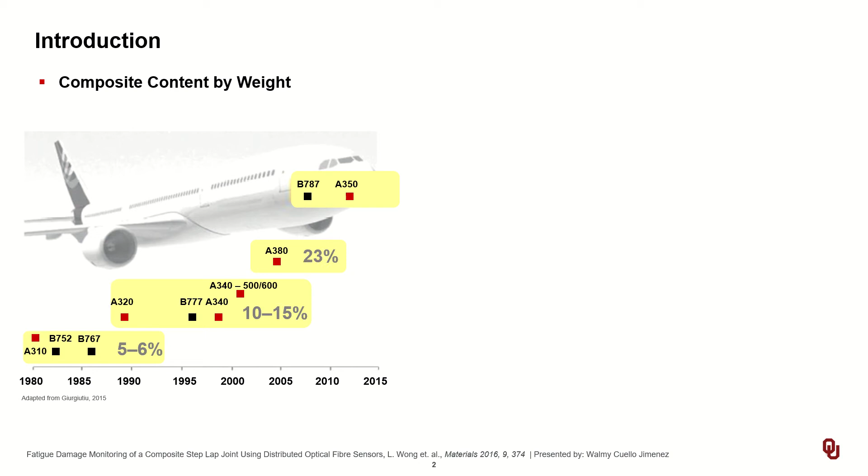Here we're looking at how the composite content by weight has evolved over the last decades. The two major aerospace companies, Boeing and Airbus, have increased their composite content on airplanes from 5 to over 50% over the last 40 years.

Large composite structures are typically manufactured by adhesive joining of separately manufactured parts. This presents several advantages, especially when compared to mechanical joints: reduced labor and costs, uniform load distribution over larger areas, reduction in stress concentrations. However, there is a key disadvantage of this technique, which consists of stress concentration at the edge of the overlap.

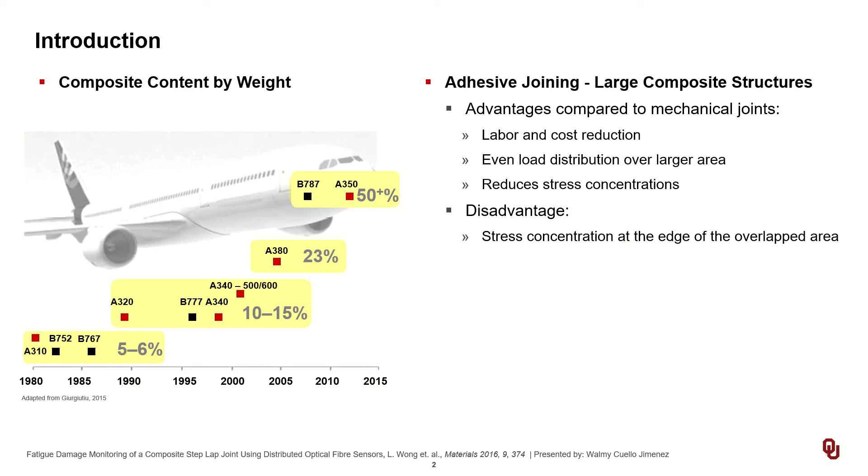In order to minimize the peak stress, or the stress concentration, many groups have proposed the use of step-lap joints as an efficient joining methodology. A step-lap joint consists of manufacturing the parts with a series of steps that result in greater bonding surface area, reduction in stress concentration at the end of the overlap, high joint strength, and more importantly allows for efficient and effective joint repairs. Ultimately, reaching more than 50% composite content by weight in the aerospace industry could not have been achieved without the use of step-lap joints.

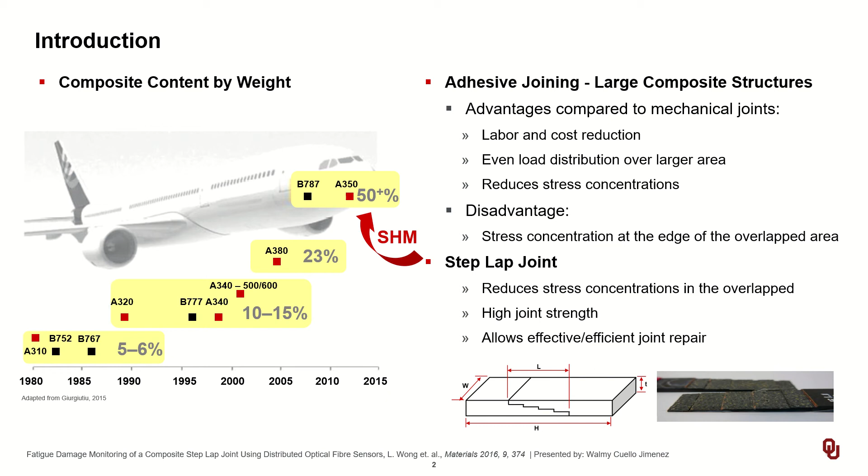Consequently, this work focuses on structural health monitoring and evaluation of step-lap joints by employing distributed optical fibers to monitor fatigue failure. An optical fiber consists of three key components: a core, an annular cladding, and a protective coating.

They have multiple advantages, including immunity to electromagnetic interference, resistance to corrosive environments, the ability to multiplex multiple signals into a single fiber and then allow for measuring multiple variables, and allowment of embedding the fiber into composite materials for real-time and in-situ monitoring.

However, there are two key disadvantages: the need of optoelectronic equipment in order to translate the optical measurements into meaningful physical variables or measurements such as temperature and strain, and the bandwidth required for these devices to be able to post-process all the data collected.

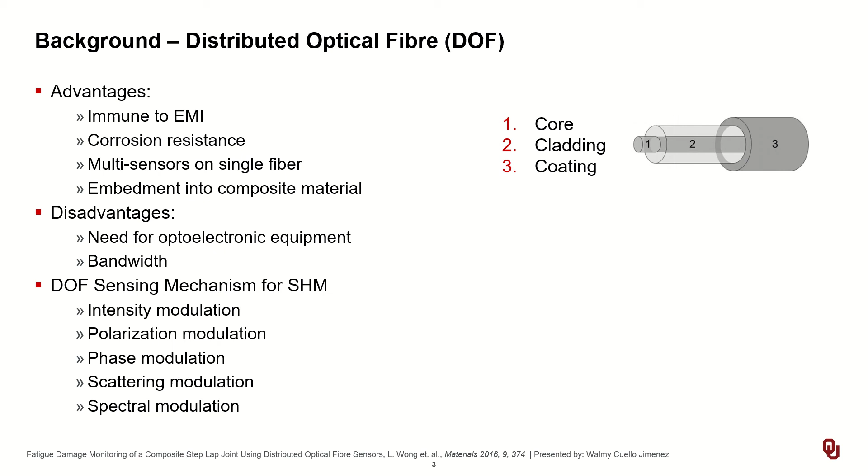There are 5 key sensing mechanisms for structural health monitoring: intensity modulation, polarization, phase, scattering, and spectral modulation. Perhaps scattering modulation will be one of the key measurements.

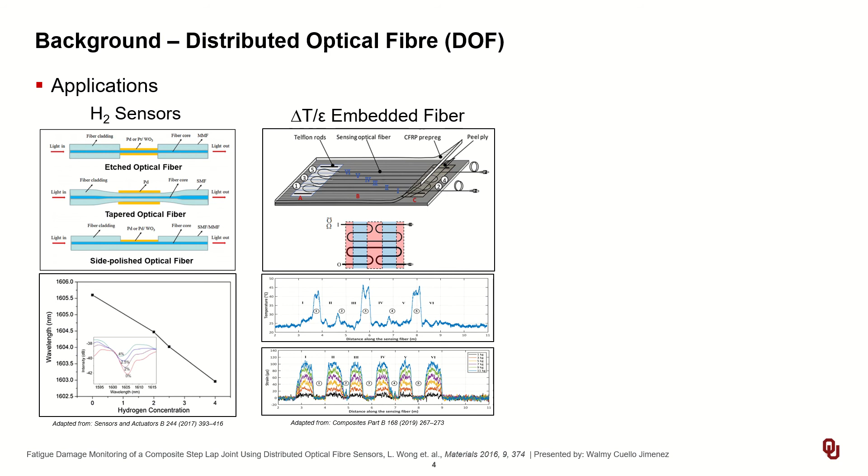There are multiple applications of optical fibers. Among those we have gas sensors, temperature and strain in situ monitoring by embedding the fiber into the composite structures, and fatigue monitoring.

The sensing mechanism used in the present work consists of Rayleigh optical frequency domain reflectometry coupled with swept wavelength interferometry, or SWI. The sensor interrogator uses an optical distributed sensor by Luna Technologies with spatial and temporal resolution of 5 millimeters and 1/100 of a second respectively.

The SWI system is based on the Mach-Zehnder interferometer, which consists of a laser that generates continuous wave, an optical fiber which guides the light through the system, couplers which split the light to and from the arms of the interferometer, reference arms that provide reference or benchmark signal to that of the tested fiber, and finally a detector which detects the incident optical intensity.

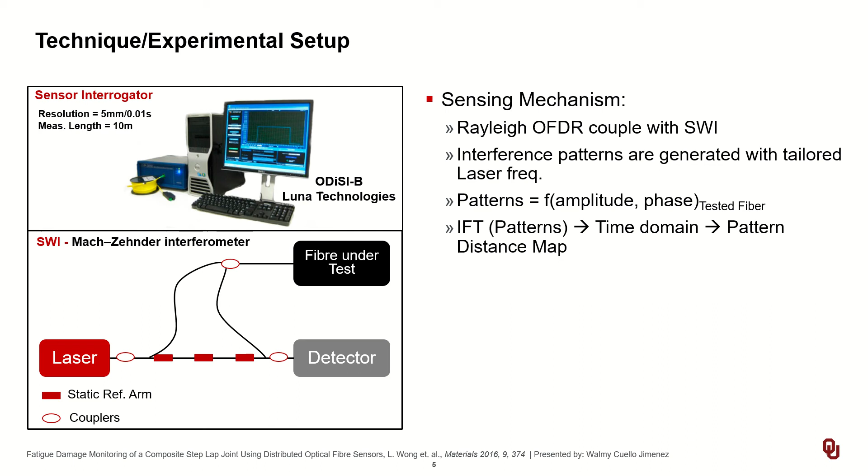Now in this work, the interference patterns are generated as frequency is tuned. These patterns are a function of amplitude and phase of the tested fiber. By employing an inverse Fourier transform of these patterns into the time domain, it is possible to construct a map of this pattern as a function of distance.

It is also important to specify that the Rayleigh amplitude is unique to the fiber being employed. Therefore, as you stretch the fiber, the frequency pattern is also stretched. And as the frequency is proportional to temperature and strain, it is possible to calibrate optical change or a frequency change and a wavelength change into a resultant temperature or strain measurement as the equation below is showing.

In this equation, lambda is the wavelength, nu is the frequency, k sub t and k sub epsilon are the temperature calibration and strain calibration constants.

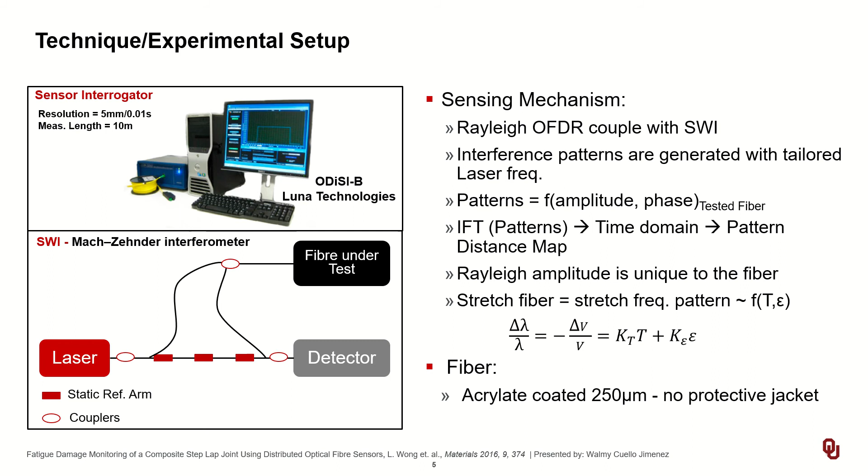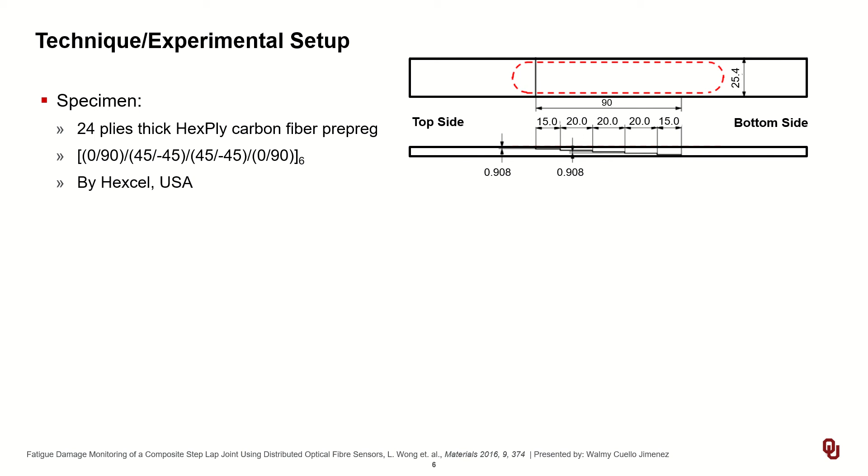The adhesive used was a FM300-2K by Cytec in Australia. Each step of the lap joints has a thickness of 0.908, and the bond line area, as per the schematic, is 90 times by 25.4 square millimeters.

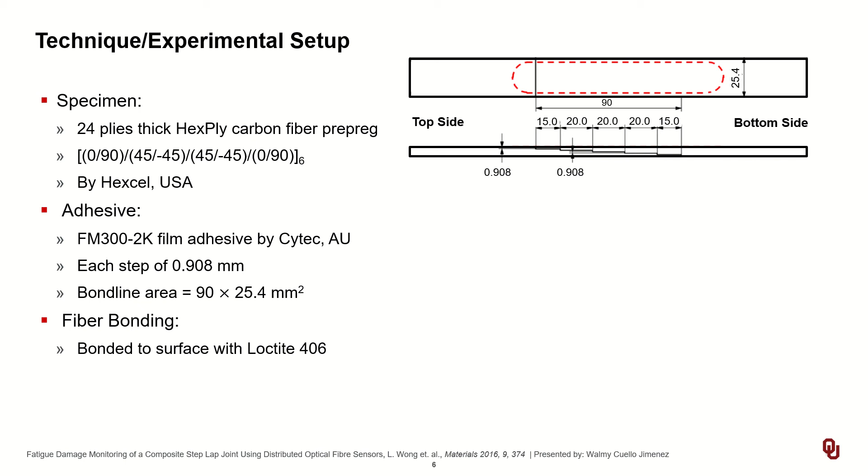The fibers were bonded onto the top surface of the specimens following the red dotted line pattern with Loctite 406 component. And finally, the specimens is placed into a loading cell with a capacity of 100 kilonewtons to perform the fatigue testing. As you can infer from the setup, the photo of the fiber was split into fiber 1 on the left and fiber 2 on the right for experimental purposes mainly.

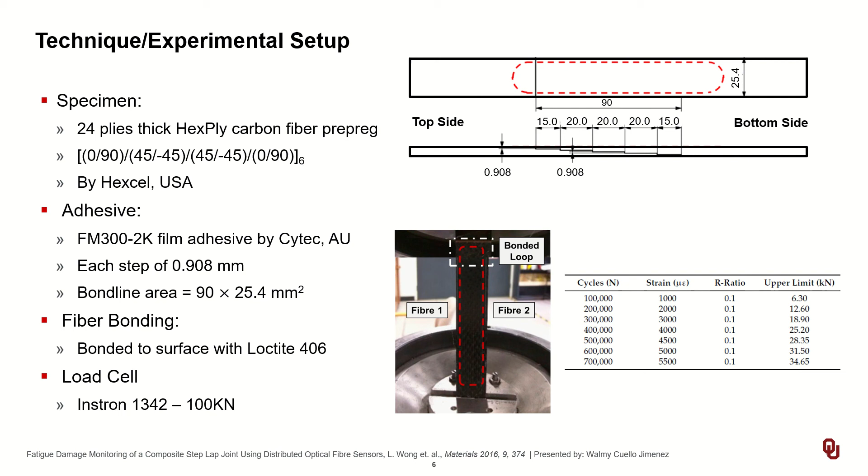Now the fatigue testing is designed to increase by 1000 microstrain every 100,000 cycles with a minimum to maximum stress ratio of 0.1 throughout the entire experimental evaluation.

The first experimental evaluation consisted of determining the ability of the system to monitor dynamic strain. For this, the midpoint of fiber 1 was evaluated by exposing the specimen to a fatigue loading of 5 Hz while sampling at 17 Hz.

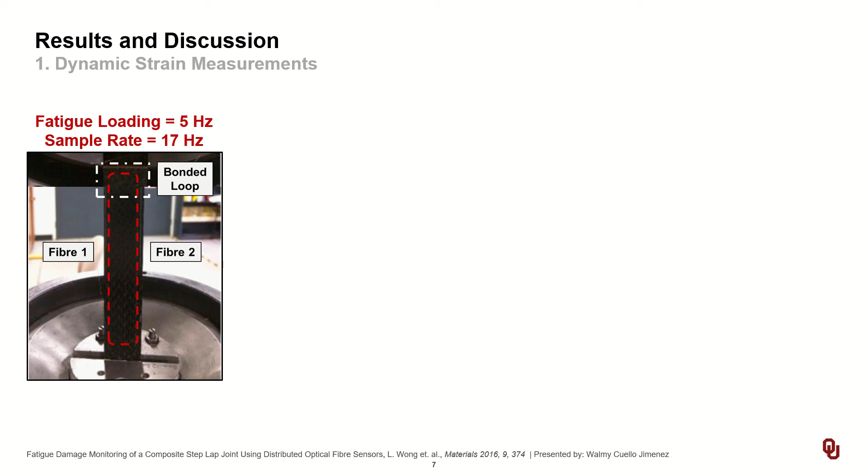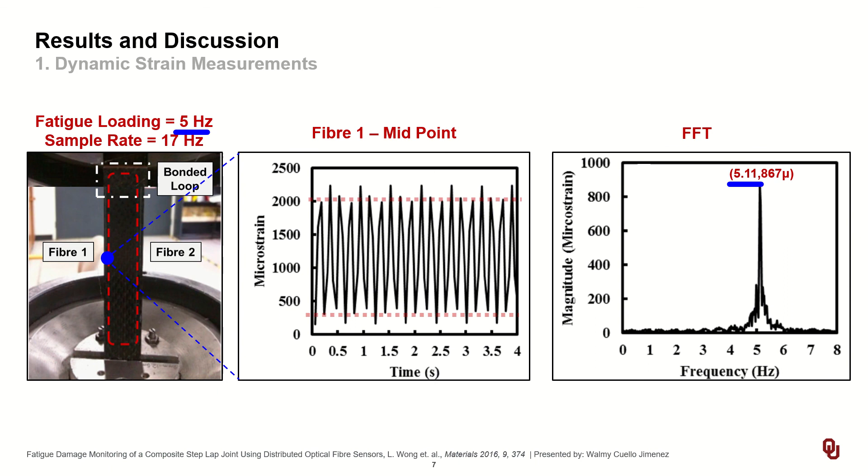Results show only the first 4 seconds of data, where the strain ranged from 200 all the way to 2000 microstrains. By employing an FFT, a cyclic frequency of 5.11 Hz and a maximum microstrain amplitude of around 870 microstrain were determined. Interestingly, results indicate that the strain measured by the distributed optical fiber system corresponds to the fatigue loading profile.

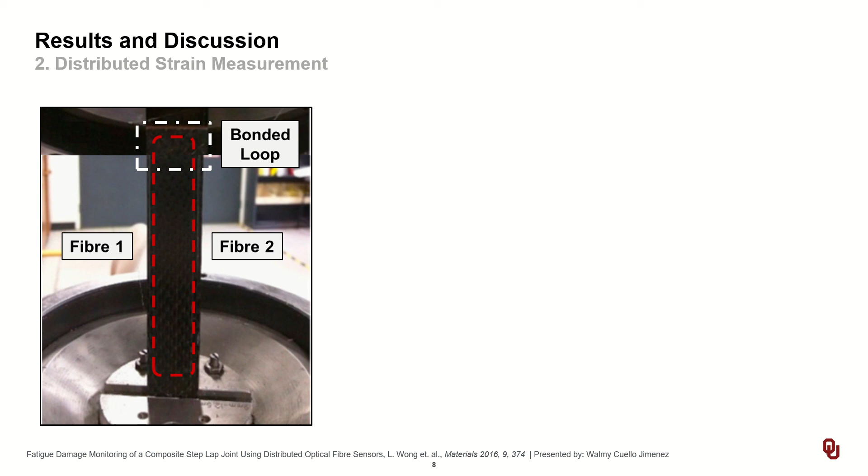The second evaluation consists of monitoring the ability of the system to measure distributed strain across the entire fiber prior to fully diving into the fatigue evaluation. Results show the effect of different loading regimes on distributed strain, and 4 key features can be immediately identified.

First, fiber 1 and 2 results are essentially mirror images of each other, which makes sense since they are both in the axial direction with respect to the load being applied, using opposite sides. Second, the consistency across both fibers proves that optimum bonding between the structure and the fiber has been achieved.

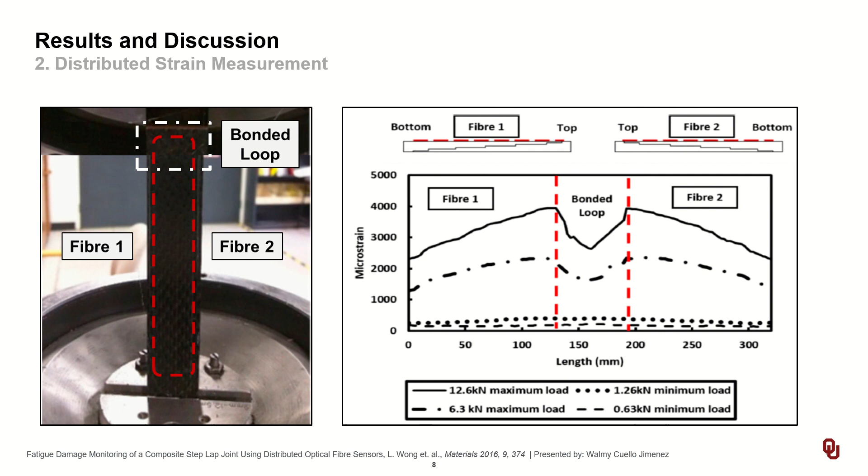Third, the top region shows greater deformation than the bottom one, which is attributed to the geometry of the specimen, with the top region having a shorter bonded thickness. Fourth, and lastly, reduced strain is observed in the loop area, which is expected considering that the fiber is intended for measuring strain mainly in the axial direction.

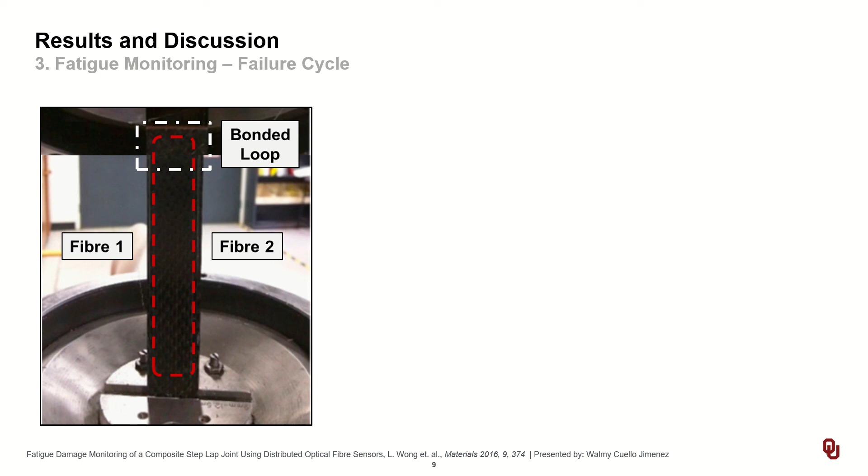Once it is proven that the system can measure distributed strain along the fiber, the focus turns to monitoring fatigue and ultimately the path to the failure point of the system. The strain was monitored again at the midpoint of fiber 1. The entire fatigue test was conducted for about 14 hours.

In the strain versus cycles chart, it can be observed that the loading increased by about 1000 microstrain after the first 200,000 cycles, at which point the load cell was set to stop for 1 minute prior to increasing the loading scheme by 1000 microstrains, maintaining a stress ratio of 0.1 throughout the experimental evaluation. All of this, as shown in the results, was detected by the distributed optical fiber sensor.

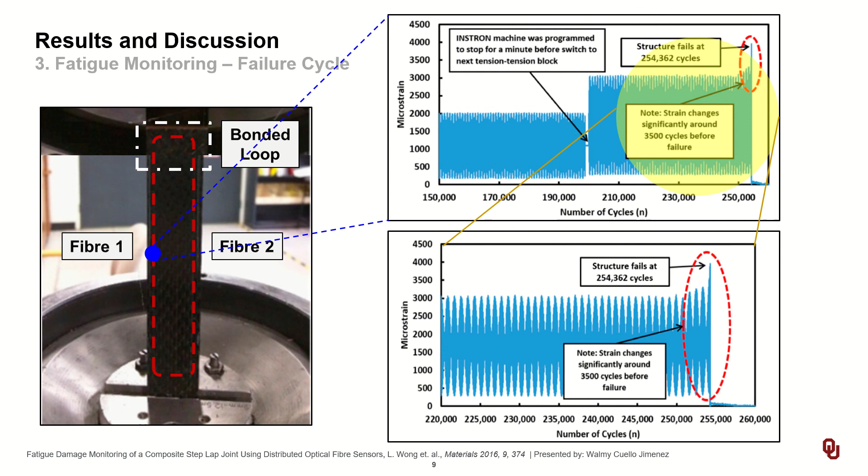Zooming into the last 35,000 cycles, results reveal that failure occurs after about 254,000 cycles. The strain gradually changes over the last 3,500 cycles prior to failure. Perhaps more importantly, the ability of the distributed optical fiber system to measure strain change before failure takes place, and the location of the fracture point, can be used as an indication of damage along the structure.

Then the ability of the system to generate a 3D distributed strain map is evaluated by monitoring the strain of fiber 1 over multiple cycle loads. Results depicted in the 3D chart of strain versus cycle versus length during the 3000 microstrain loading regime clearly reveal the point at which the structure fails.

The strain changes significantly over the last 4000 cycles, and more importantly, this demonstrates the distributed optical fiber sensor's capacity to perform real-time and continuous monitoring of structural health in regards to both temporal and distributed changes to the structure.

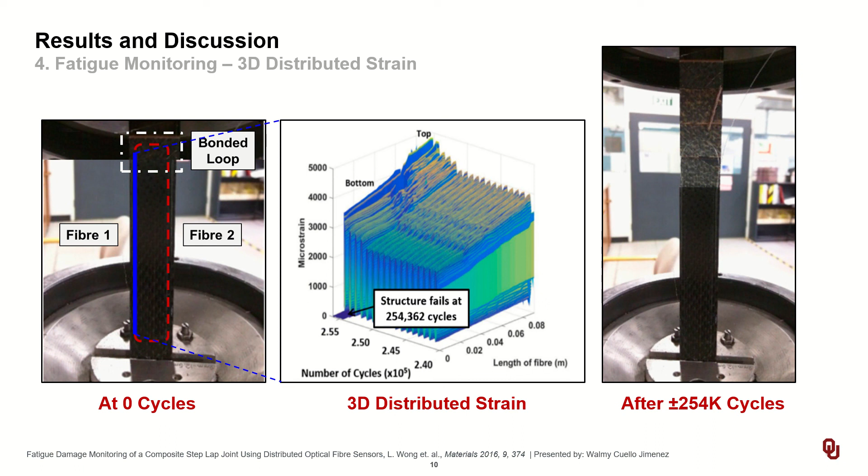Now the photos of the specimen after failure indicate that first, ply failure takes place, followed by net tension and adhesive failure. Lastly, to complement the work, it was necessary to further prove the ability of the system to measure the life cycle of the specimen.

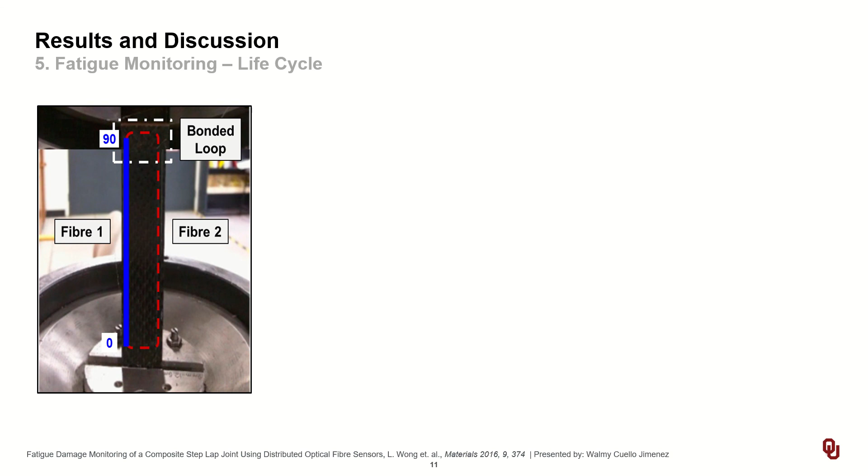This was accomplished by focusing on the last 50,000 cycles, using the 200,000 cycle strain measurements as a reference.

Results from strain measurements across fiber 1, from 0 to 90 millimeters, the bonded area, indicate that the strain at the bottom edge is relatively constant from 220 to 250,000 cycles. On the top, there is a gradual increase in strain over the same cycle range.

However, this was due mainly to the change in adherend thickness from top to bottom, with the top being only 4 plies thick, whereas the bottom was 22 plies thick. The disbond, or progressive bond failure, can be attributed to the increase in strain with the increased number of cycles.

Eventually, in the last 4,000 cycles of the loading scheme, cracks are attained from both sides, top and bottom, of the bonding interface, as seen during the cycle range from 252 to 254,000 cycles. All combined, this proves that distributed optical fiber sensors could be ideal for damage assessment, monitoring, and fatigue crack growth along the bond lines.

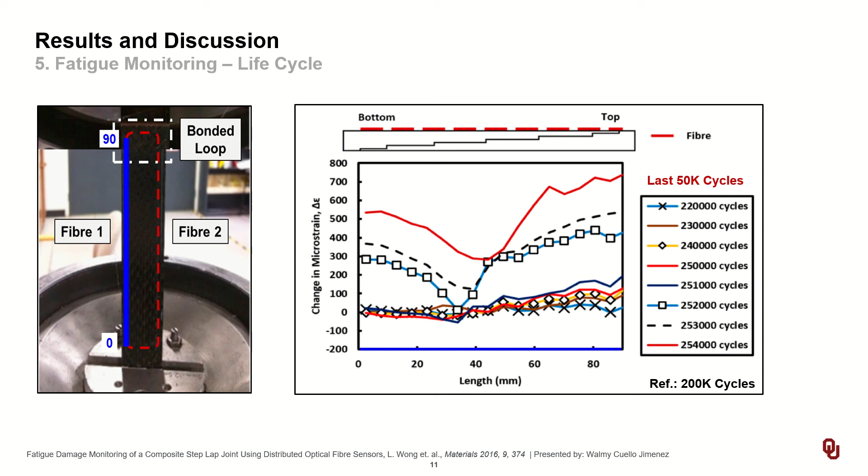Conclusions: distributed optical fiber sensing is an attractive methodology for structural monitoring of composite materials. Distributed strain evaluation proved able to identify fatigue damage and eventual failure of a step lap joint. Distributed strain measurements allow for in situ, real-time monitoring of the condition of the bonded step lap joint prior to catastrophic failure.

This can be achieved without the need of any inspection. Finally, these methodologies allow for both in-flight and on-the-ground detection and monitoring of composite structures from both temporal and spatial references. Thank you.